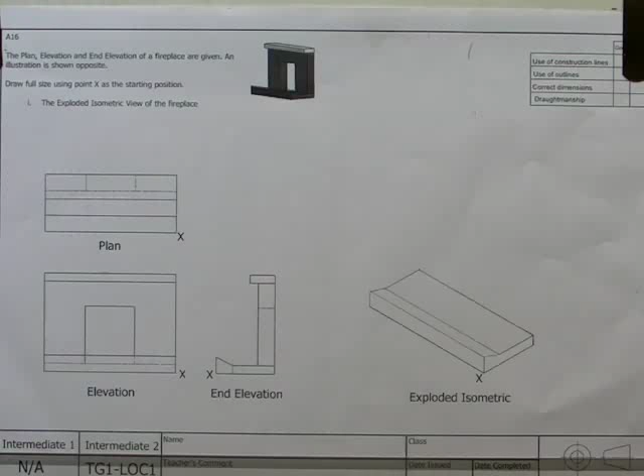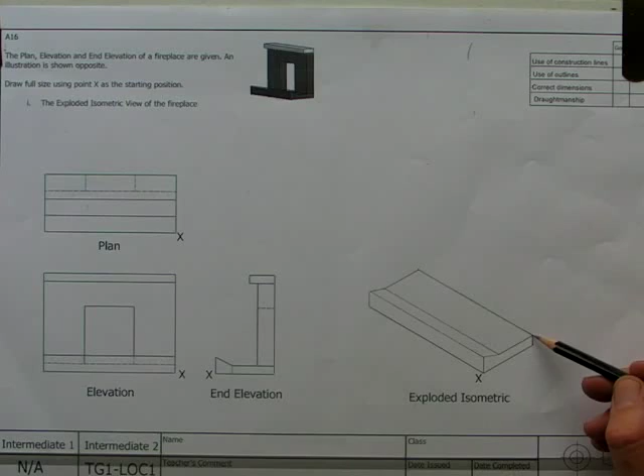The next part is fairly easy to construct. You can see here that this fireplace part, as I'm calling it, rests on top of the hearth here. Now we're not going to draw it on top of it because it's to be an exploded isometric, so what I'm going to do is choose a point here and here where I know that both parts come together. Okay, so you can see that this back part here joins the hearth at that point.

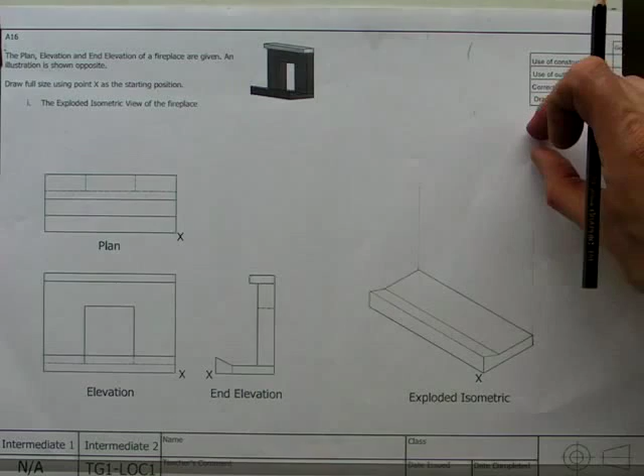So I'm going to project that point up and project it up on the other side. And that gives me a guide to where I can start drawing the back part. Now there should be a gap between them, so I'm going to choose a sensible gap that's going to allow me to fit this part in and also fit the mantle in. So if I leave about, what's that, maybe 40mm gap, it doesn't need to be perfect, it's your judgment,

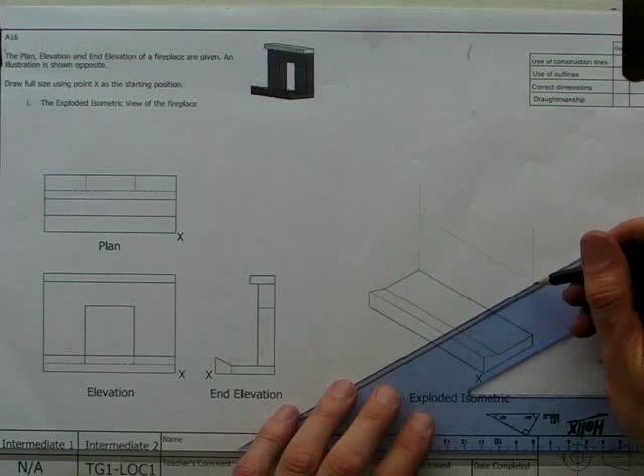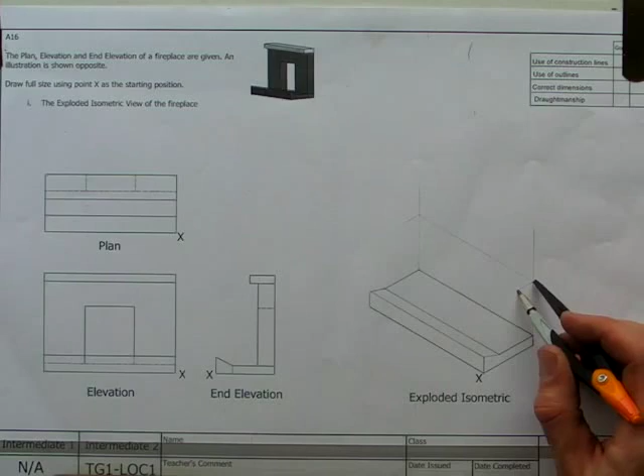and all I'm going to do is just draw a line across there, and that lets me know that that's my starting point. So all I'm going to do is just kind of measure up and form up the bottom of the fireplace. It comes out by this amount here, which I can measure. Just mark that one there. That's how far out it comes.

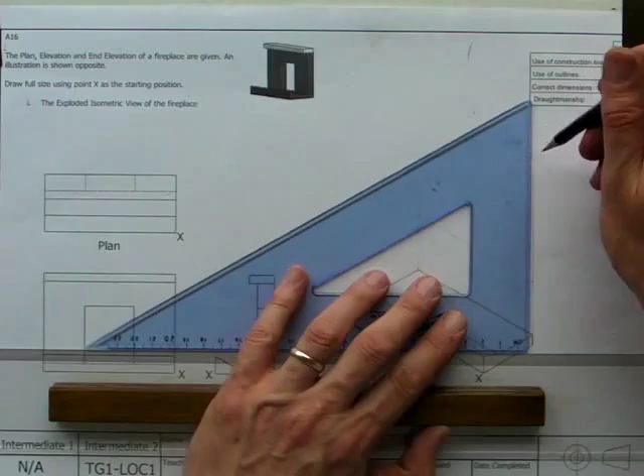And height wise, it goes up this amount here. So we just extend that line up, extend this line up, extend this line up, extend this line up. And then using the size we've already measured, mark that one.

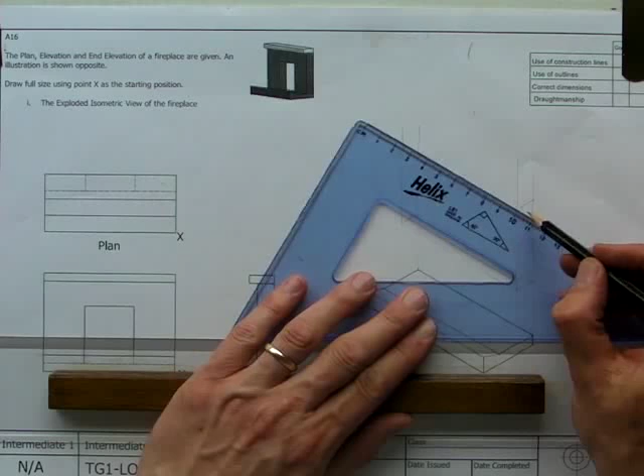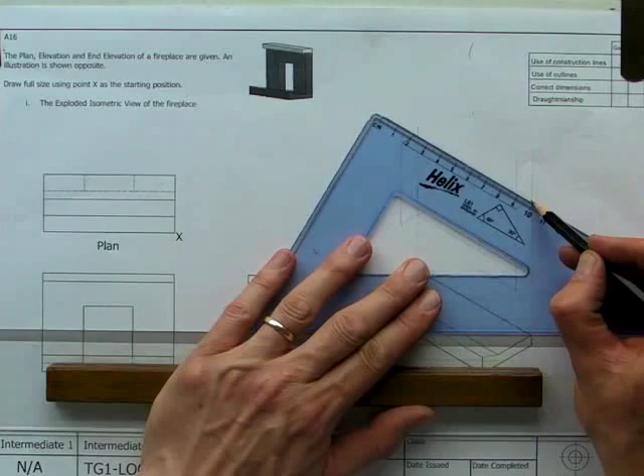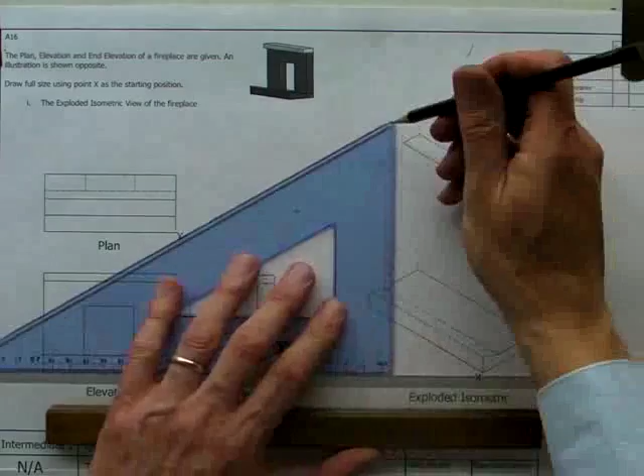So there, it goes right across to there, right across to there. Then we can just join these lines up. So I'm going to firm in the lines that I know. I know that line there is going to be an outline, and that one there, and then just to the end here, here, and then just draw down to there, draw down to there, and to there, and then same on the other side to there. Now they're the only lines that I can be certain of at the moment.

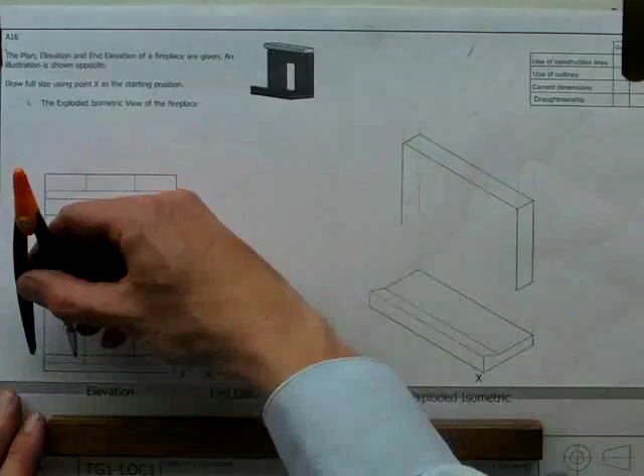What I need to do now though is draw in this cut out part here. Using the elevation, work out how far it is in from the edge. There, I can just mark that on. It's symmetrical, so I can do the same from the other side. So that lets me know how far along the opening is. So I'll just draw a couple of construction lines up there. In terms of height, you've got to be careful here because that's the bottom of the fireplace part there, so that's where I've got to measure from.

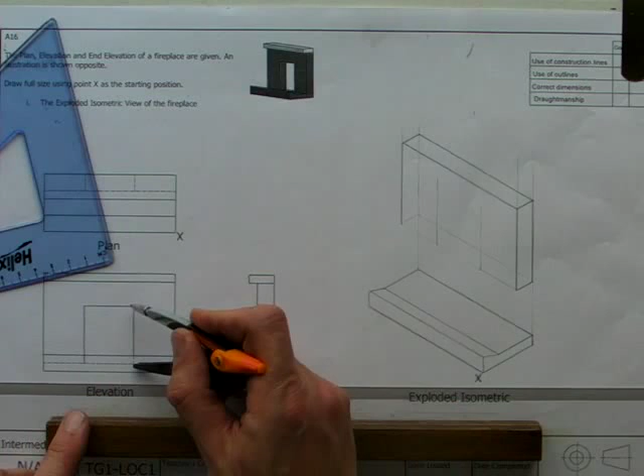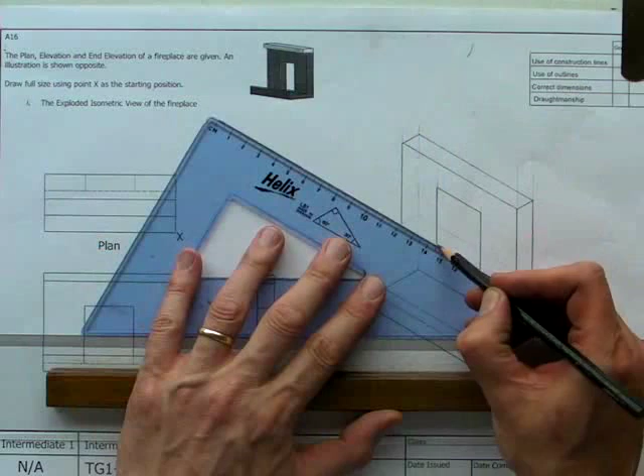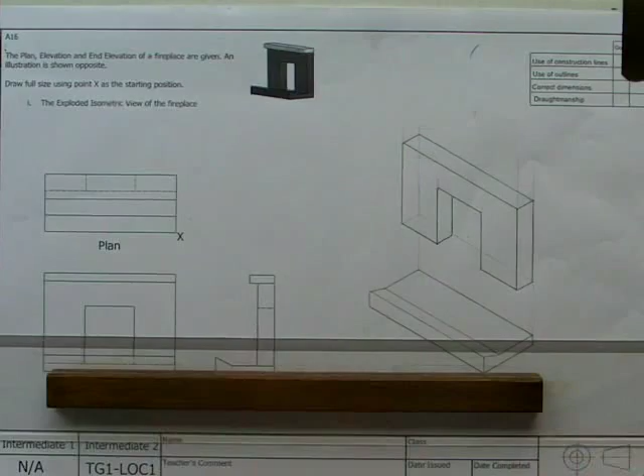Mark that one there. That gives us a point there. And then just firm these in. A common mistake is to stop at that point, which would be wrong, because we need to draw in that line, and then finally a line that will disappear behind there, and that's that part done. That's job done on that. And just fill in that wee gap there that's appeared.

Okay, last thing to do is to draw the mantel, the bit at the top. So extend these lines up. And if you look at the drawing, you can see that the back of the mantel is lined up with the back of the fireplace part. So I'm just going to choose to draw that here. This way it's the same width as the whole thing, so I can do that with confidence.

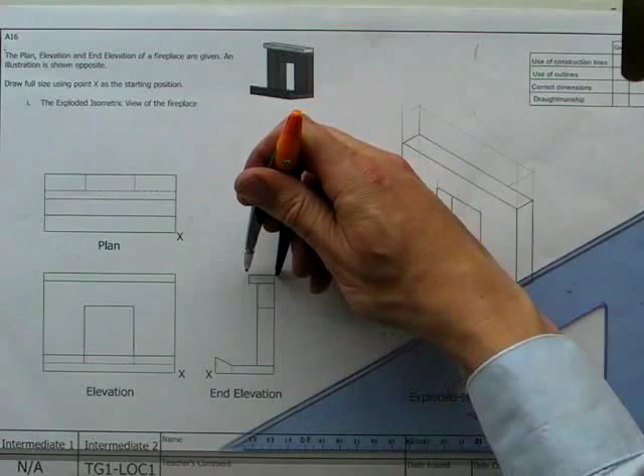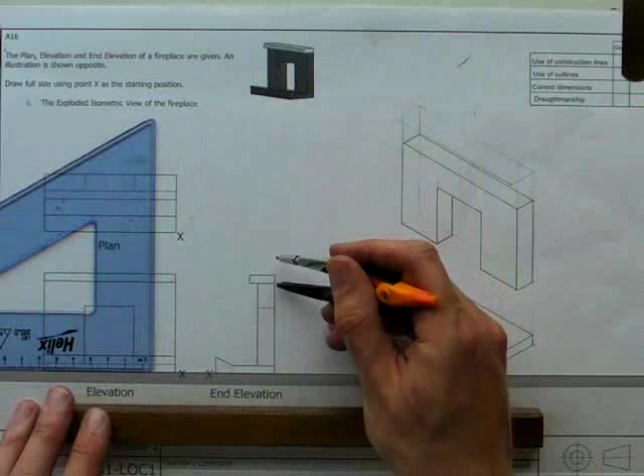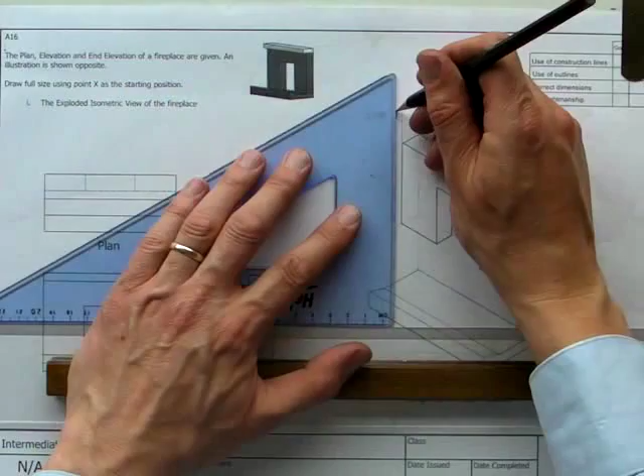Just extend these lines out, and all we need to do is measure how far out they come using this compass. Mark that on here. And then extend the lines up the correct height, which I can do just by measuring. Mark it on. Draw another line, and basically that's it.

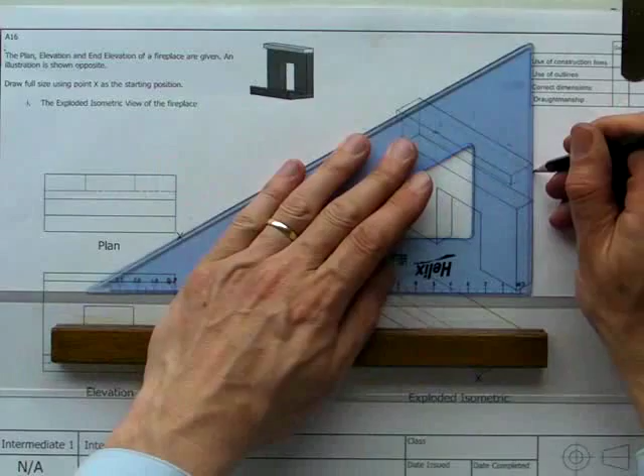The ideal situation is that there should be a space, or daylight as I like to put it, between each of the parts, and I think I managed to achieve that. I could probably have pushed the mantel up a wee bit more, but you can see that there's definitely a space there, and a space there, so that's that done.